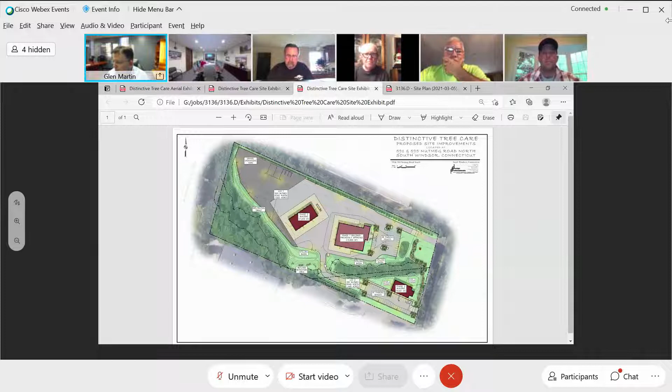For lighting, the lighting plan proposes modern LED light fixtures on 20-foot high poles in the parking areas and along the driveways. Wall light packs will also be on the buildings. Proposed lighting will provide safe light levels in the parking areas, driveways, and sidewalks. All fixtures are full cutoff fixtures. In conclusion, it is our opinion that we have met the zoning requirements with this development while providing for the needs of our client. Are there any questions?

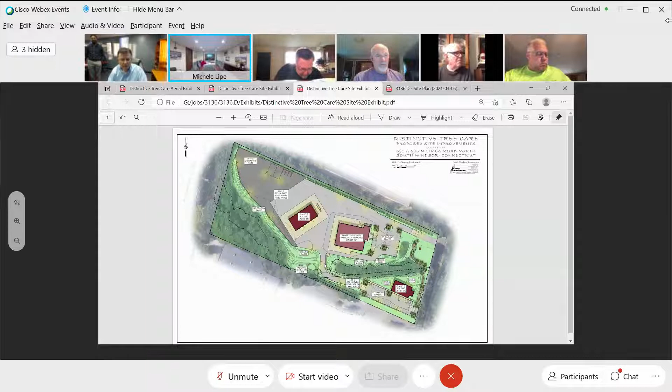With the addition of this building, the impervious coverage is proposed to be 53%. We allow up to 65%. The proposed parking requirement is 50 spaces. They're providing 38 on this site, and they're proposing an additional 12 spaces on the site at 591 Nutmeg Road. We would require, since these will be separately owned, that there's some kind of easement or agreement with 591 to accommodate the parking. We'd also look for a cross-travel easement to be put into place.

Other improvements mentioned include lighting, 20-foot high poles, as well as building-mounted lights. There are regulated wetlands that affect both lots. They did receive wetlands approval on April 7th. There's some existing bonds in place that they're going to require to be maintained, as well as an additional $5,000 bond for wetlands mitigation area.

We do hold that bond for 3 growing seasons to ensure that area gets properly established. As mentioned, the proposed storage building will have vehicles that can drive through it. Design review reviewed the site on January 9th, and we're satisfied with the proposal as presented. The site will be serviced by public water and sewer. WPC approval is not required for the storage building. The fire marshal has reviewed the plans and has no comments.

Signage is proposed to meet the zoning requirements for both freestanding and building signs in the industrial zone. This application is approved. The town staff has no additional comments or requests. Okay, thank you very much.

I'll turn to our town engineer, Jeff Doolittle. Thank you, Mr. Chairman. Just real quick, a few comments on this application. They didn't show any utilities for this building, so I inquired about that, and the response was they will add electric service to that building.

There is a gas tank and pump shown on the north side of that building. I asked about a canopy. They said they're still designing that. It's not a requirement, but I know some places have that.

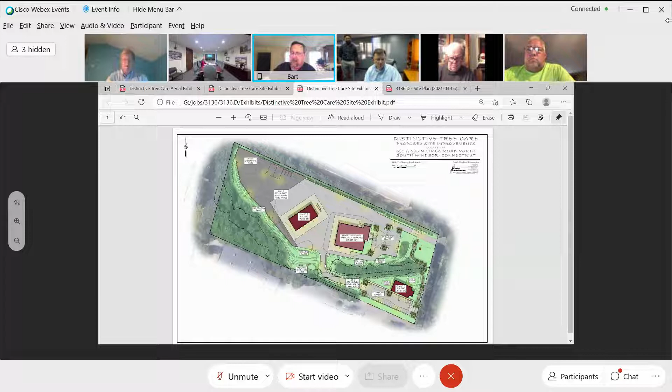At this time, we really need to start our public hearing. I don't think we can do our commissioners' questions at this time, so we'll have to take that up later in our meeting. Okay, we'll stick around. And I apologize to the applicant, I wish we could have gotten it done quicker.

So at this time, we'll go into our public hearing for the Planning and Zoning Commission for Tuesday, May 11th, 2021. Our first item is application 21-11P, Newco South Windsor LLC.

Can we let the applicant in, please? Michael, that would be Ben Wheeler, I believe Don Poland, Greg Nanny, Peter Donnelly, Tim Wentz, Plessy Brown. Am I missing anybody? Robert Rybeck? About David Gagnon. David Gagnon, yeah.

Thank you very much. Chairman Pacekonis, good evening. Nice to see you again. Peter Donnelly for the applicant. We'd like to, fine, thank you.

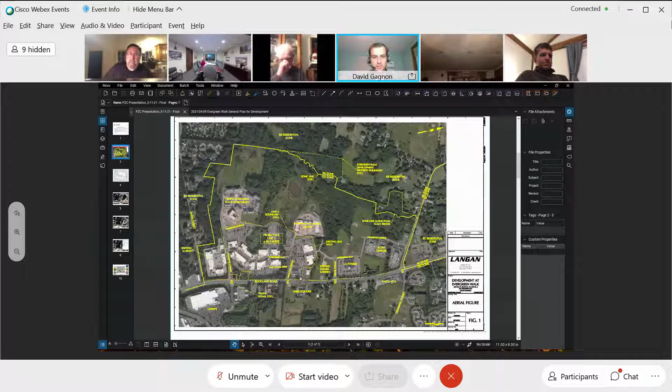As I mentioned, the focus of our application will be on Unit 2, which is in the southeast corner of Evergreen Walk, consisting of roughly 48 acres.

Zooming in on that area to discuss Unit 2, this is going to be the focus of our application. As you can see highlighted in red, this is our future proposed development area, so our proposed work will be limited to this area. To orient everyone, to the west of our property is the independent living complex, and to the north will be the Costco, which was recently approved and will soon be under development.

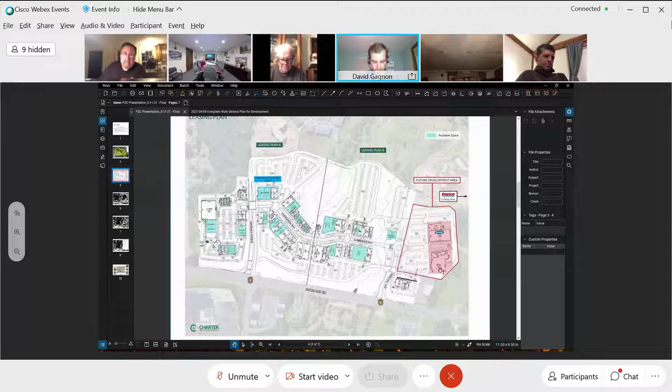As I was mentioning, to the north of our property would be the Costco, and within our development area is the Old Navy, and there's a Japanese restaurant. There are two building pads here totaling 53,000 gross square feet.

And then this would be our proposed general plan. Right here, Unit 2, this would be the limit of development we just discussed. What we're looking to do is demolish those two buildings.

So there's two buildings totaling 53,000 square feet, replacing it with one structure of 50,000 gross square feet. On the eastern side would be a 40,000 square foot grocer, and to the west a 10,000 square foot retail building. The main parking field will be in front of the development, with loading in the back.

One of our main goals for this project was to complement and enhance the existing development. We tried to do this through maintaining the general theme and continuity of Evergreen Walk, which we think we accomplished visually through landscaping, lighting, and site design, as well as through proposed connectivity, which we'll discuss in more detail, including drastically improving pedestrian connectivity through the plaza via a number of sidewalks.

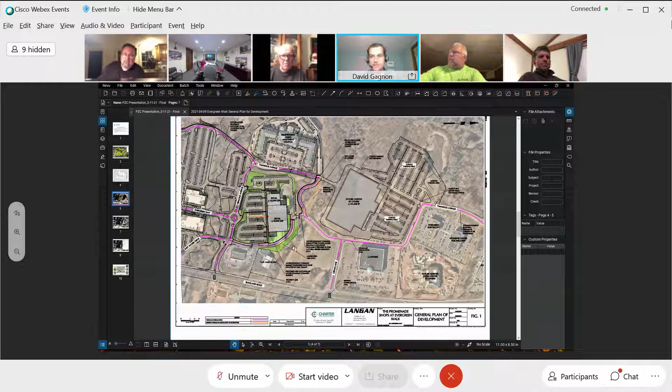Thank you, Dave. Good evening. My name is John Plante. I'm a professional engineer with Langan Engineering Environmental Services, a managing principal in the firm, and I'd like to talk to you about some of the connectivity aspects of this proposal.

As Dave said, the current Evergreen Way bisects the existing parcel, which has a couple of different uses, but you'll also remember it used to have a grocer in there. In talking with DOT, since this has an OSTA CO, they asked us to look at this as a grocer, not just another retail part of the shopping center, which is different from how Highland Park was considered. So there is some slight increase in trip generation, but it's fairly nominal, and in reality it probably mimics what was out there previously.

So we looked at various configurations of this building to determine how best to site it on this unit, while still providing the connectivity and safety that are the hallmark of Evergreen Walk, and meeting the requirements of the tenant. We really tried to separate vehicular travel patterns from parking areas, and the same for truck access and loading, keeping truck access on dedicated roadways to avoid conflicts, making a safer plan than having traffic cut through a parking lot or through the front of a building with lots of pedestrians.

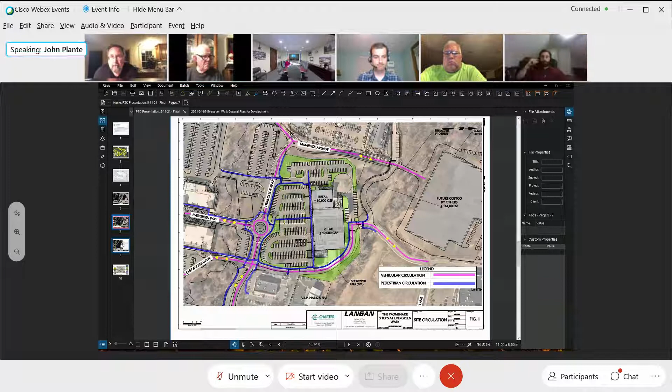I just wanted to give a general overview on the planting and the lighting for the proposed site. Starting with planting, we see this as a great opportunity to complement the existing development and maintain a planting theme that's consistent with what's been successful elsewhere throughout Evergreen Walk. We also see this as an opportunity to help screen the adjacent independent living to the west of the proposed development area by way of evergreen trees and shrubs, just like Dave is pointing out on the screen. All plantings we propose will be native, drought and salt tolerant species.

That's quick on planting, but moving over to lighting. Similar to the planting, the site lighting will be designed to enhance and build on the existing character of Evergreen Walk, through the use of similar or the same fixture types, maintaining a similar hierarchy to what's already installed elsewhere throughout the development today. Site lighting will consist primarily of parking lot fixtures in the parking areas, and then pedestrian scale post-top fixtures installed at key nodes and pedestrian spaces, again to add that pedestrian scale.

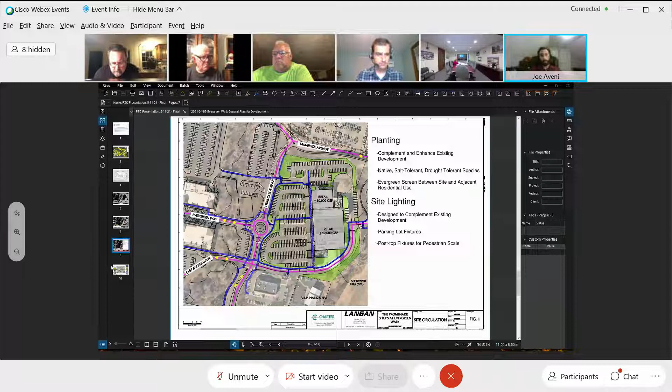Dave, if you want to go to the next slide. So the last area we really wanted to talk about was the improvements at the intersection of Tamarack Avenue and Buckland Road. Again, we see this as a great chance to provide an even more positive entry experience into this overall development of Evergreen Walk.

So please let me know if you have any questions or comments, and I'm happy to provide any response.

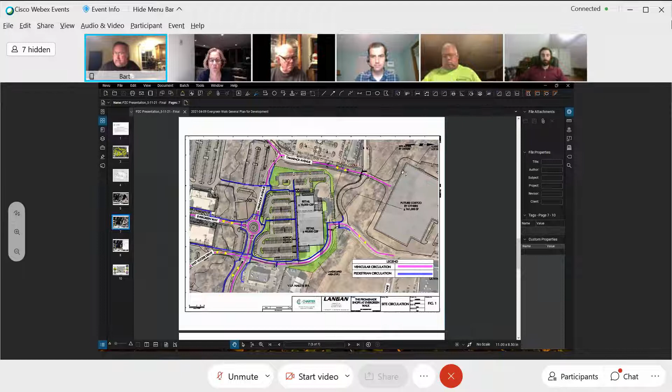This is proposed changes to the general plan of development for the Evergreen Walk, including the realignment of Evergreen Way to accommodate a new 50,000 square foot retail building, replacing two buildings totaling 53,000 square feet on property located at 151 Buckland Road in the Buckland Road Gateway Development Zone. As the Commission's aware, we originally approved this general plan in 2001, most recently renewed in 2014 with several modifications over the years. The last time you saw it was with the Costco development, the addition of that.

You have been provided the general plan. We would request that the applicant update some things on the chart on the general plan, including the completion of the daycare, the completion of the independent living facility and assisted living facilities, just to have current data on that general plan. We also look for clearer labeling on the general plan related to Evergreen Way as a street.

This layout represents a significant change to the previous approved general plan, locating Evergreen Way on the eastern side of the new building, wrapping around it and connecting back up with Evergreen Way. They're showing a loading area to the rear of the building with a truck turnaround area to the west. This area should be screened from the adjacent residential use at the time of any site plan application. The new traffic pattern will disrupt Evergreen Way, adding a jog to the road, so additional signage may be needed to clarify the road network.